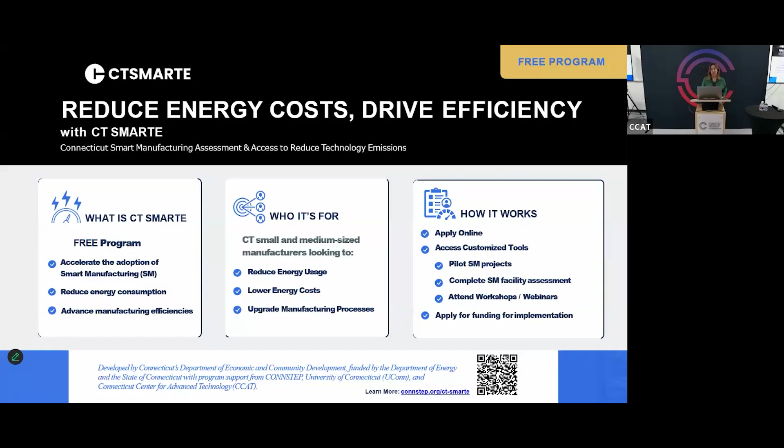We're doing this in a variety of ways. First of all, we are partnering with three great partners: CCAT, UConn, and CONNSTEP. We are providing SMMs with improved pathways to support and funding to enable them to adopt the low-hanging fruit in the smart manufacturing world, which is facility upgrades, but also the more in-depth and more expensive opportunities in digital twin, digital thread, and more advanced technologies.

We're doing that through offering energy and smart manufacturing assessments of your facilities through UConn's ITAC program. We are doing it through offering workshops and trainings such as this one hosted by CCAT. But in addition to that, CCAT and UConn are both looking for demonstration projects.

They want to work on projects for your companies if you're not ready to move into the smart manufacturing realm on your own. Some of these projects include, in the digital thread realm, automated CNC programming, digital twin and machining optimization, autonomous part transport, autonomous deburring, AI vision - and see how smart vision leverages deep learning to perform visual inspection on your parts - and automated inspection. So these are just a few different projects, in order to spark your imaginations, that we are here to help you learn more about and bring into your facility, doing the work for you.

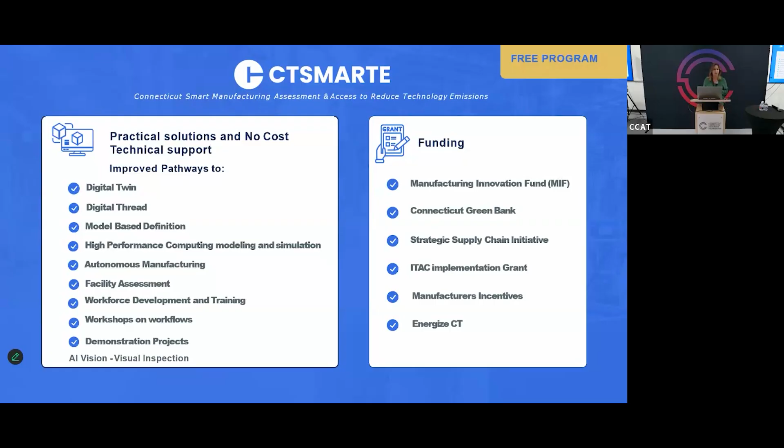We have money from the Connecticut Green Bank. We have a new initiative in the state of Connecticut called the Strategic Supply Chain Initiative. We have the ITAC implementation grants, which is money to bring in some of the improvements and energy efficiency measures that the ITAC team discovers in their facility assessments. There are manufacturers incentives through CCAT's partners. And we also have money from the utilities. They are very willing and able to help support transition to energy efficient components and different products to help reduce energy consumption. That's kind of where we see our best efforts going. We can't reduce the rates, but we can help you use less.

So essentially, benefits: product development, time to market, reduced energy consumption. Here are a few samples of how these things can help save time and energy.

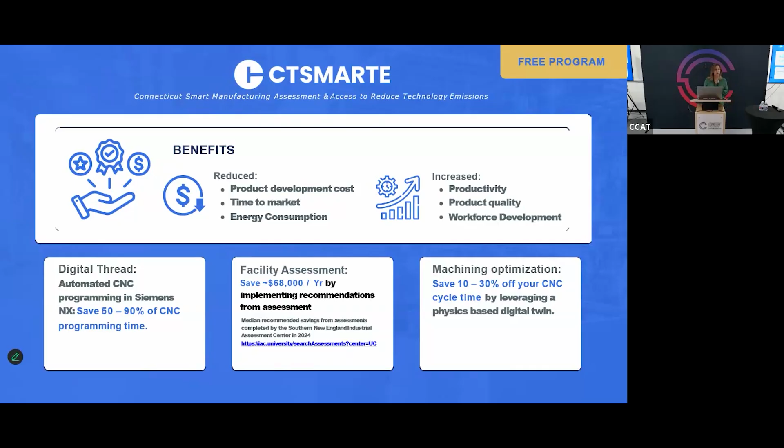So adopting smart manufacturing means a lot of things to a lot of different people. So in order to be more specific, we need you to come to us and talk to us about what you need, and we'll create the right program for you. By being here, you are taking the first step, which we appreciate, and we hope that by scanning this QR code, you'll get in touch with a member of our team.

Other news out of the Office of the Clean Economy and the Office of Manufacturing of the state of Connecticut, with which we are associated: we have a new Chief Manufacturing Officer who is replacing Paul Lavoie, who many of you are familiar with. Kirti Patel is the new CMO. He joins DECD after 10 years leading Eppendorf Manufacturing, a manufacturer of laboratory instruments for the life sciences industry. So we're excited to have him. He's excited to be part of DECD and help continue to move the important manufacturing sector of Connecticut forward. So thank you very much.

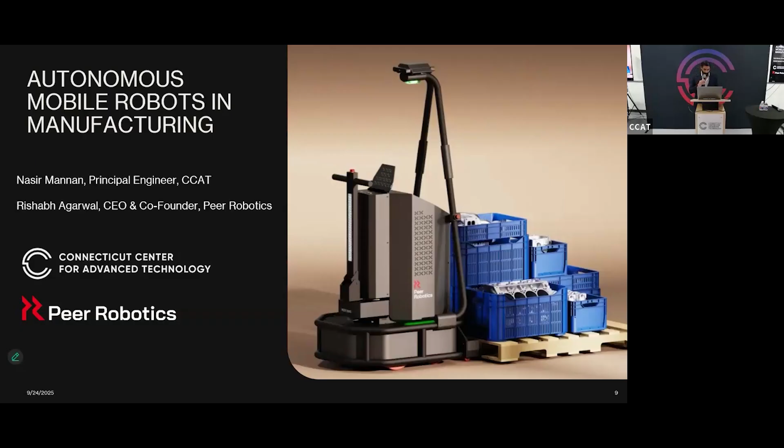We've broken up the presentation into these categories. The most important thing I want to get across is once you understand the basics of the AMR technology, specifically the Peer Robotics solution, what it means when you integrate this into smart manufacturing. We have one example using inspection to demonstrate the value of using an autonomous mobile robot in conjunction with an inspection system, and what that can mean for your manufacturing processes. Then we'll go into a little bit of the numbers.

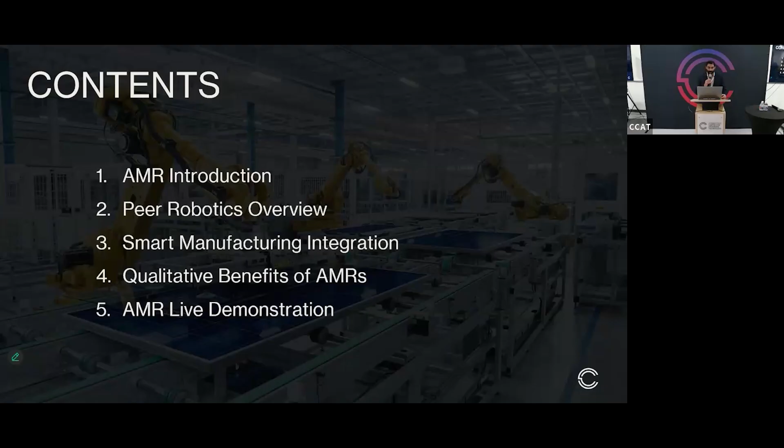What are the benefits of AMRs? What are the energy savings? What are the cost savings, as we compare them against traditional means of moving material or parts around your shop floor? And then, as I mentioned, Rishabh will show a live demonstration in terms of the interface to the robot, and some details there.

A very brief introduction to autonomous mobile robots. These have intelligent, autonomous navigation. AMRs use sensors and machine learning to navigate manufacturing environments independently and adaptively, and you'll learn more about what we mean by adaptively.

It has dynamic route adjustment. Unlike fixed path systems, AMRs dynamically adjust routes based on environmental changes for efficiency. It integrates with Industry 4.0 systems, integrating seamlessly with smart factory components, enhancing productivity and reducing costs.

AMRs improve operational safety and efficiency by performing tasks without human intervention. That's the main key takeaway here. It's without human intervention, and this is where you'll see a lot of the value.

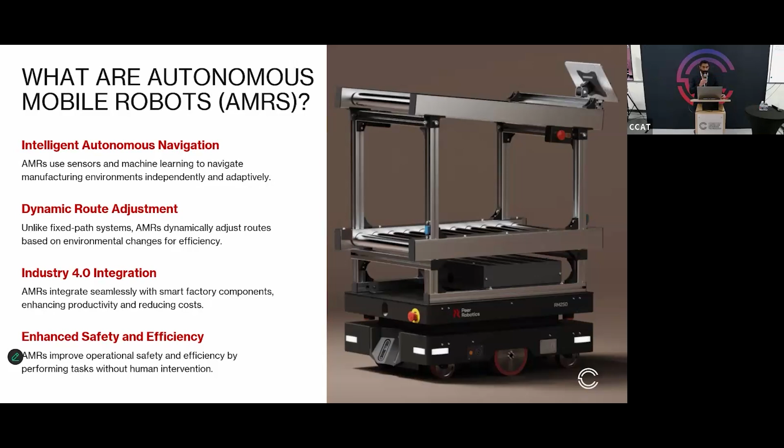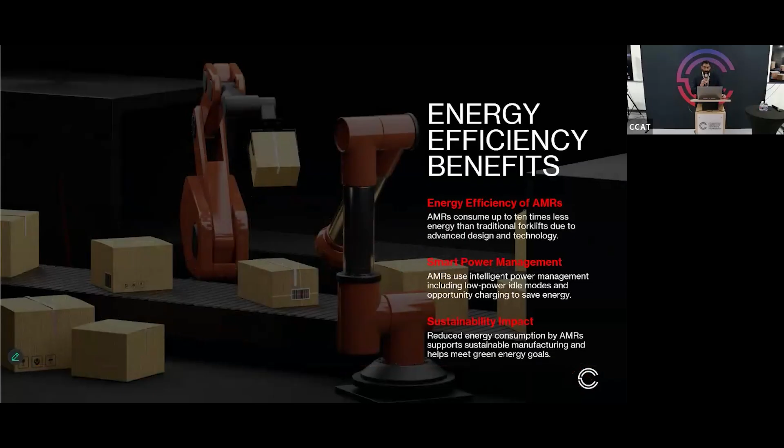On a high level, there are a lot of different energy efficiencies you gain by using autonomous mobile robots for part transport. There are other systems out there, and we'll go through some of them. AMRs consume up to 10 times less energy than traditional forklifts due to advanced design and technology. AMRs use intelligent power management, including low power idle modes and opportunity charging to save energy. This reduced energy consumption supports sustainable manufacturing and helps meet green energy goals.

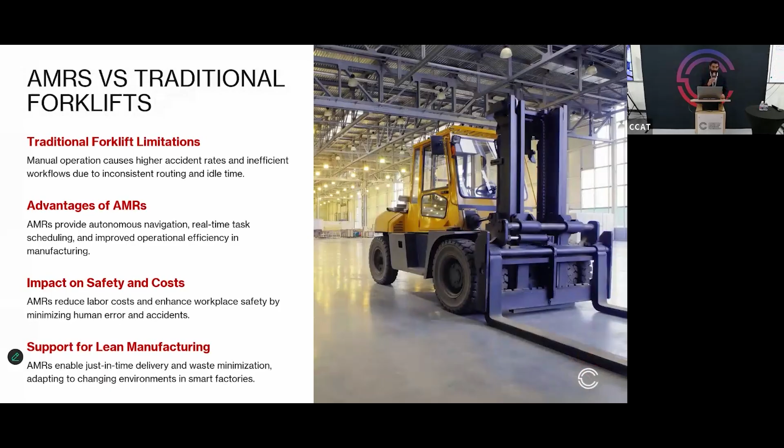If we compare this now to traditional forklifts, there are limitations with forklifts. Manual operation causes higher accident rates and inefficient workflows due to inconsistent routing and idle time. AMRs provide autonomous navigation, real-time task scheduling, and improved operational efficiency in manufacturing. AMRs reduce labor costs and enhance workplace safety by minimizing human error and accidents, and enable just-in-time delivery and waste minimization, adapting to changing environments in smart factories.

To get into more specifics about each one of those points, I'd like to ask Rishabh to come up and talk more about his AMR technology.

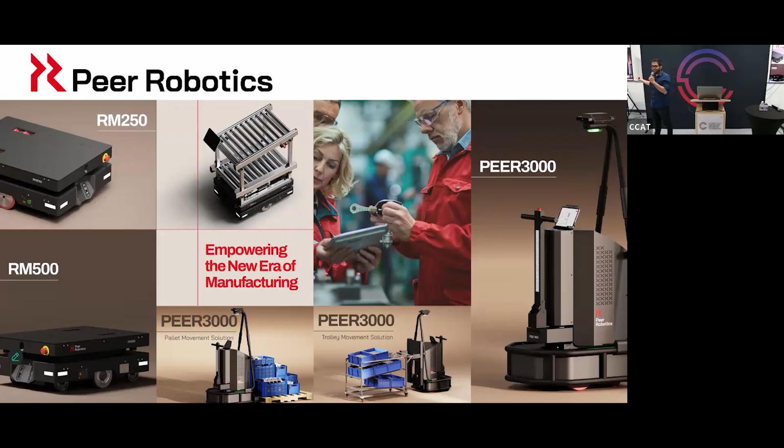So essentially, the core reason Peer Robotics exists is that we can enable these robots to learn from humans in real time. That means anyone on the shop floor can grab these robots and move them around, and in this process, the robot records data from its cameras and LiDAR systems and learns how to do the operation based on user feedback.

At any point in time, the user can teach the robot how it should function and what path it should follow. It's autonomous, but the user can guide the robot, saying that while there are four different ways of doing this particular task, they prefer one way because it's more optimal for their use case. And at any point, the user can take over the robot to put it in semi-autonomous mode.

I'll go through some videos where the robot can be switched to a follow-me mode, where a user doing a task wants the robot to follow them. They go to location X, take over, and the robot just follows the person. They might pick something up or drop something on the pallet or on the robot, and once they're done, switch it back to autonomous mode.

Finally, as Nasir was also mentioning, one of the core things is that all the data the robot collects gets passed back to the users. So it's not just about automating the physical layer, but also about the digital data we can provide back to users to help them move toward the era of Industry 4.0, or even beyond.

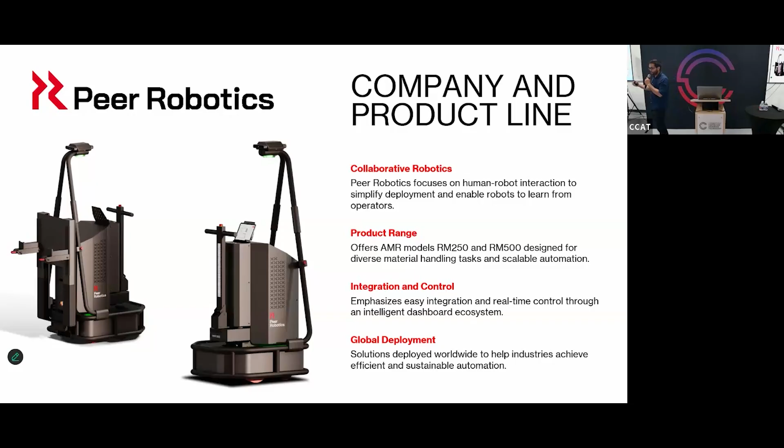Whether it's the digital twin we create as we map out the facility, or controlling directly from the MES or WMS system, tracking which pallets we've moved, where they've been staged, or the stage of a particular pallet in different locations, all this data is given back to the user so they have real-time access to it.

So just to go a little bit more into detail, this is the RM series platform. As I mentioned, they're very compact in size. The idea is to make sure that these robots can go into compact production lines, transfer bins, and really offer a flexible solution.

The product is designed with camera systems and safety LiDAR systems. After this talk, we'll go into more on the hardware side, but it can go charge itself autonomously. Anyone on the user side can even swap out the battery pack, so if they want 24/7 operations without any breaks, they can also do that.

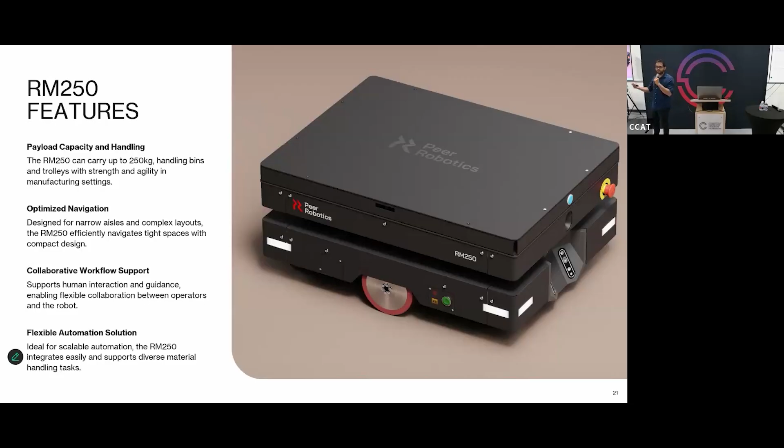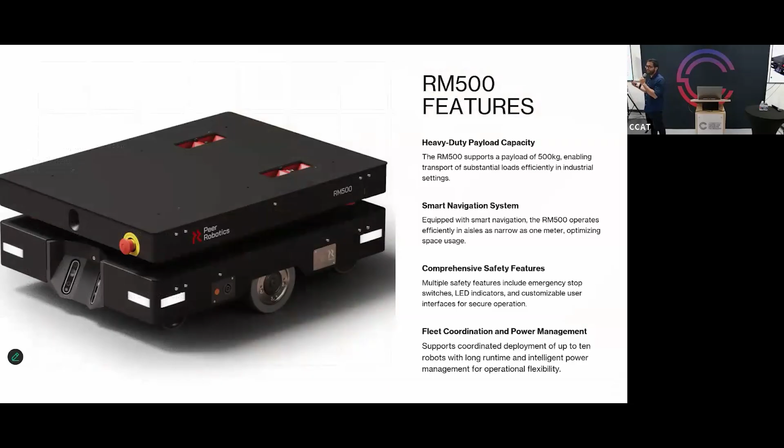More importantly, we can create custom attachments. The conveyor top or different layer systems can be created based on user requirements, personalized to their operations. Same thing for the RM500 - it's essentially just a higher payload capacity system, really used for lifting solutions or heavier items, whether it's an engine part or other custom rigs we want to create on the platform.

It should work. Yep. And this is just one example.

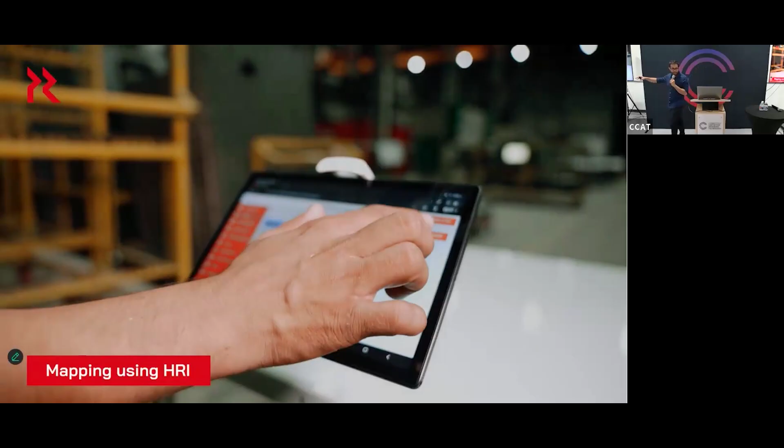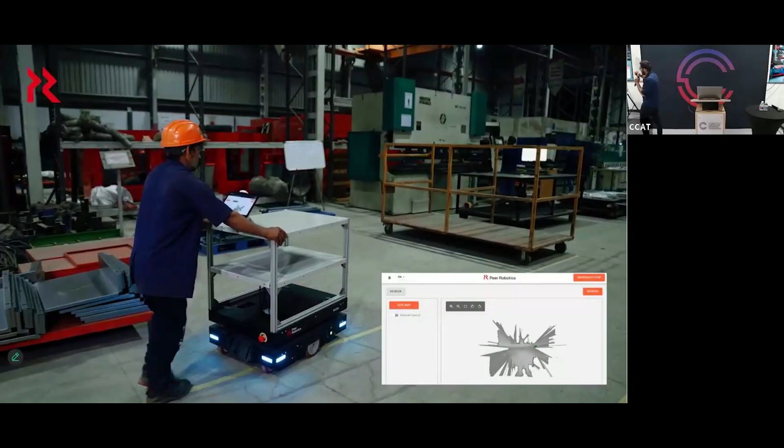We'll go onto the same interface and I'll show you these things again. The whole idea is that anyone on the shop floor can train the robot in real time. They can switch the robot to a learning mode, and as soon as the robot goes into learning mode, as they're moving it around, the robot creates a map of the facility. So you can teach an entire space to the robot by just walking it around like a trolley.

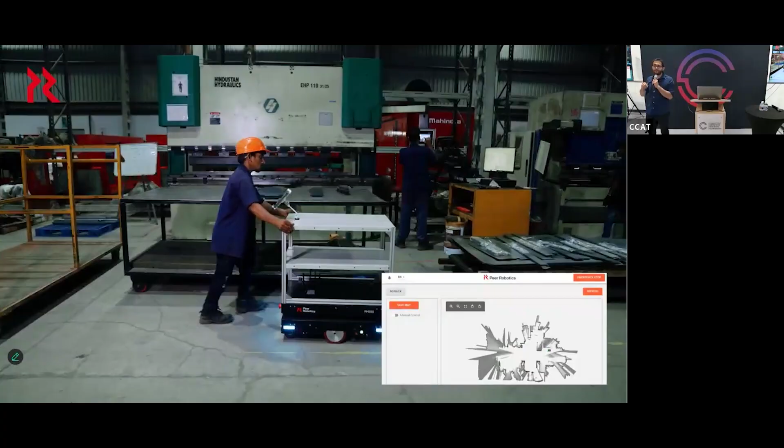You can even teach a specific path - telling the robot that now I'm going to teach you a specific path you need to follow, so you don't go into any open space, just on this taught path. You can easily teach that using the same interface.

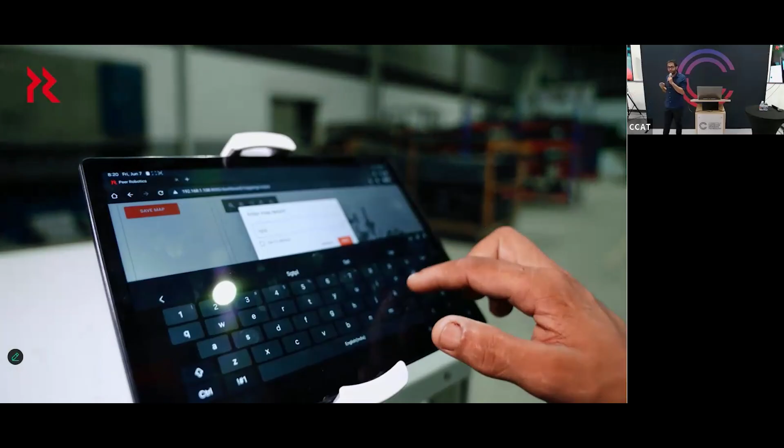That's the real patented value that we bring to the table, where we allow people on the shop floor to integrate and deploy these robots, to have that level of control. Because everywhere else, you would have to rely on complex engineering to come and reprogram these systems. And as we know, small manufacturers constantly change their operations, so if something changes tomorrow, we want them to have the flexibility of reprogramming or adapting this technology.

I'll start with the video for Peer.

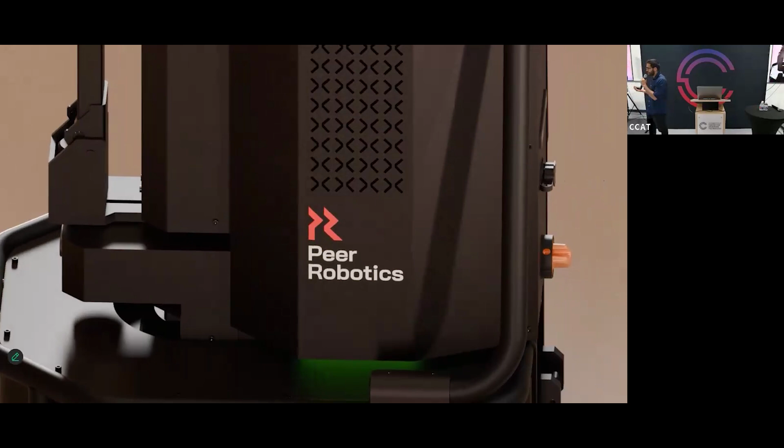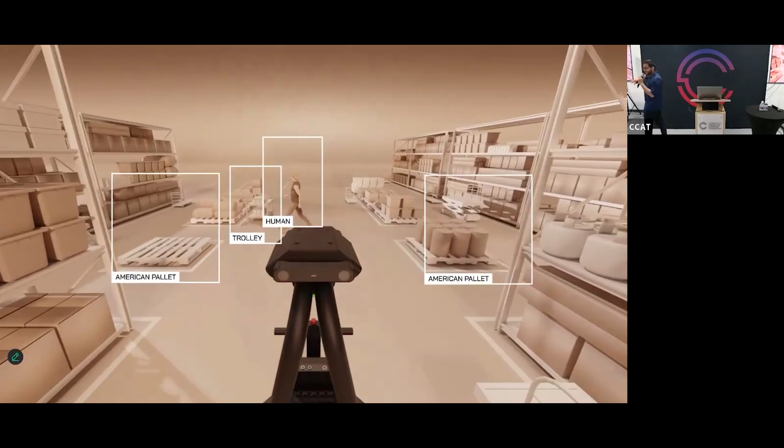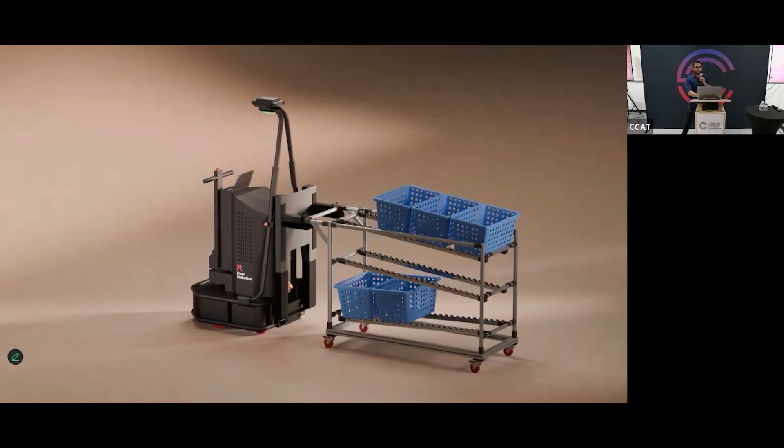It can differentiate between trolleys and pallets. So as you might notice, as the robot is moving around, it's clearly detecting that okay, that's a pallet, that's a trolley, that's a person that I'm trying to track. So when it's navigating around, it has different behaviors for different assets.

Imagine the robot has to go and drop a pallet - it knows that pallet-to-pallet staging would happen. So if there's another pallet very close by, I still want to go almost 2-3 inches close to that pallet and drop it there. We don't want space unoptimized or unutilized. Whereas if there's a person, I don't want to go 2-3 inches close to a person and drop a pallet there.

So that's where it's very important that the entire robot is built upon vision intelligence. It has LiDARs for safety, but its entire intelligence stack is built upon a custom vision stack to enable that.

The other core aspect of the platform is we wanted to create a system that adapts to our users' requirements rather than asking our users to change their operations to adapt to the robot's requirements.

That's where the hardware is designed from the point of view of creating end effectors. We are very much aware of manipulators having different grippers or end effectors for different tasks. We brought in a similar concept where we swap out different attachments to adapt closer to the user requirement.

What that means is it allows us to adapt to your existing assets, automating them without modification. No need to change layouts, replace infrastructure, or upgrade whether they are moving a train of carts, trolleys, a closed American pallet, or a European pallet — the robot can adapt to those requirements.

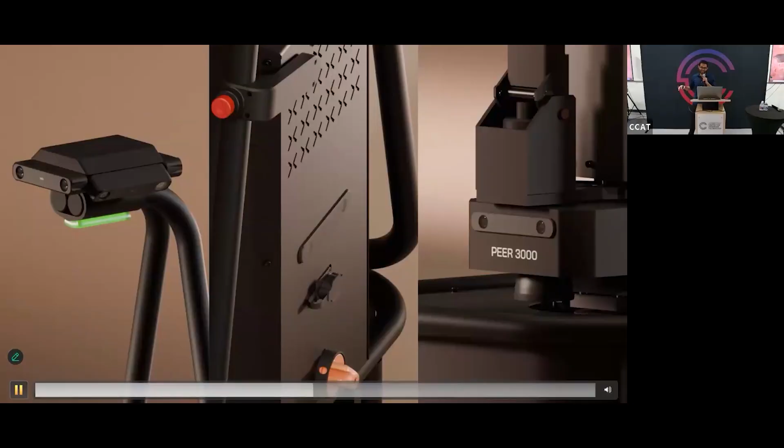Peer 3000 learns by observing its environment. With its extensive sensor suite, it captures rich visuals and spatial data. This enables the robot to build a human-like understanding of your floor layout, allowing it to navigate naturally and safely within your dynamic environment.

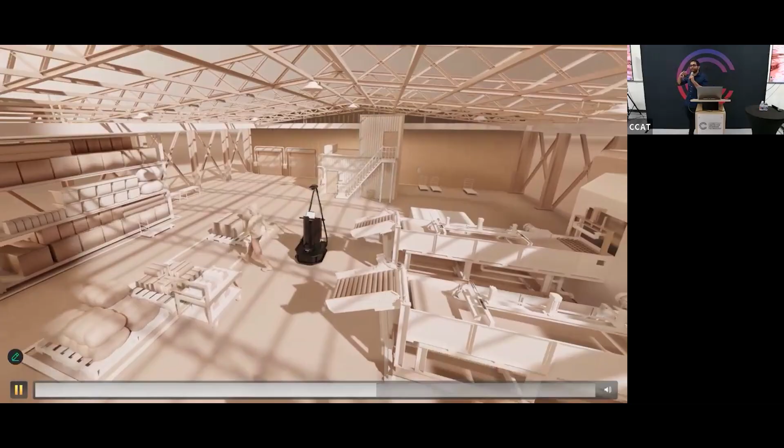All learning happens on device. The only time we communicate to the cloud is to pass on information regarding which mission we are going to do next, or to take feedback on what we have completed, with no reliance on the cloud or MES/IT system.

Peer 3000 is collaborative by design. We wanted to build a system that operators can grab and guide like a regular pallet jack, and that can adapt and learn while performing realistically.

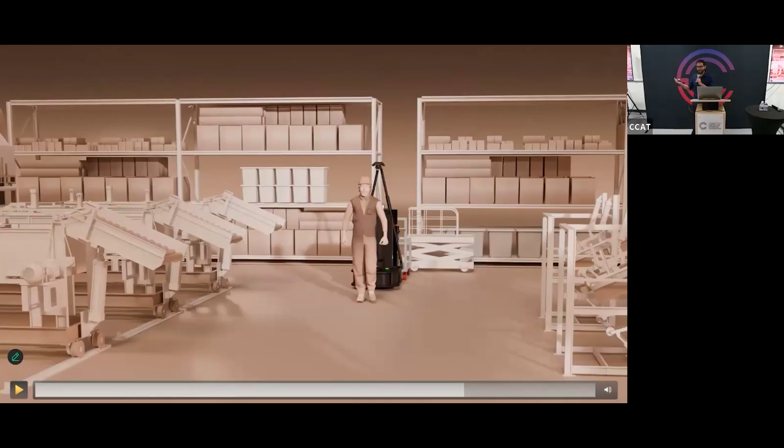We all know Wi-Fi in manufacturing is not the best, right? So we don't want to rely on any safety or intelligence aspect that is Wi-Fi dependent.

Similar to RM250, the robot is collaborative by design and can also understand human feedback. You can grab the platform, move it around, and it acts just like a pallet jack — intuitive and hands-free. You can take over the system at any point, or tell the robot to follow a person using the follow-me feature.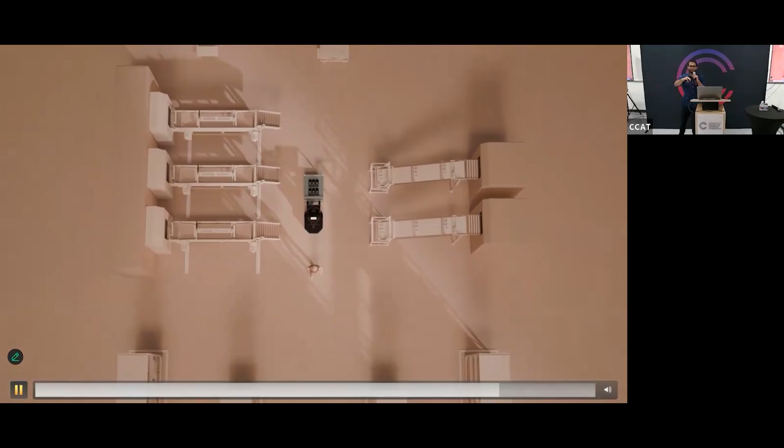From narrow aisles to varied payloads, Peer 3000 flexes to your operations. I'll show you more videos so we can have more discussion afterward, where I can walk you through how this platform works for you and what areas we have already deployed these systems into.

That's a very high level overview of the platforms that Peer Robotics offers. Our whole mission is that we want to build something which can adapt to our user requirements, and we want to empower people on the floor to have the control to deploy, train, or reprogram these robots as and when they want.

So with that, I'll bring back Nasir. He will talk more about how joint end-to-end integration can happen with these platforms, with AMRs to other MES or manufacturing related ecosystems.

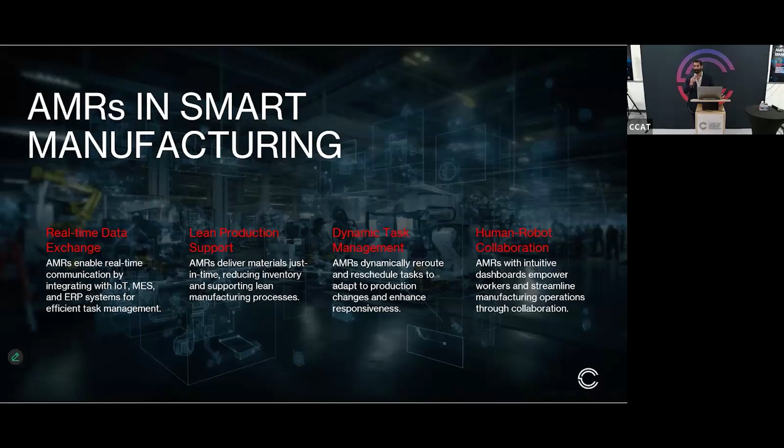So what I'd like to get into now is to talk more specifically about the use case, one of the use cases that we're setting the system up for now. But before getting into that, I want to talk about non-contact inspection in case you're not familiar with it. Typically with inspection, we talk about manual inspection, maybe using contact-based systems like CMMs or hand measuring devices such as calipers and other measuring devices.

So just to level set, let's quickly talk about non-contact inspection and what it is, and then how that relates to the AMR system we're talking about here today. The main features of non-contact inspection - obviously with any inspection system, there's calibration. You have to calibrate the unit.

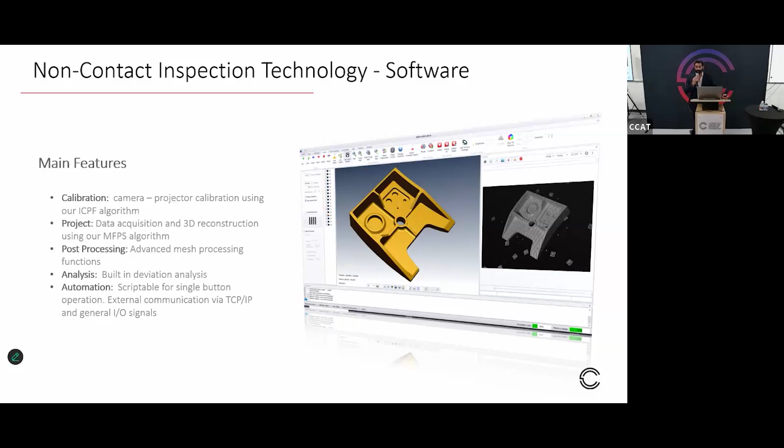Then after that, you export that mesh out and put it into an analysis software, or you do it within the scanner software if the particular brand has that built in, and you extract measurements off of it. As an example, this is a deviation analysis that can be done within most scanning solutions.

Here, what we're doing is importing the CAD model, and then using the alignment tools within the scanner software to align the 3D scan to the CAD. We can do that just on best fit or with specific features - if we have datums that we have to align to, we can use that in the software. And then the first thing we can run is a deviation analysis. For every point captured with the 3D scanner, it can calculate how far off it is from the CAD surface, and it colorizes that.

So what you're seeing here in green is a range that was set to say colorize all the data points that are within plus or minus, let's say 5,000ths, which might be a global tolerance on the part, to colorize it green so we can see what's in tolerance, and anything that's out, color it a different color. In this case, red is where my physical part has too much material, and blue is where my physical part has not enough material. So you can see exactly where it's in and out. But then you can also extract hard dimensions off of this as well.

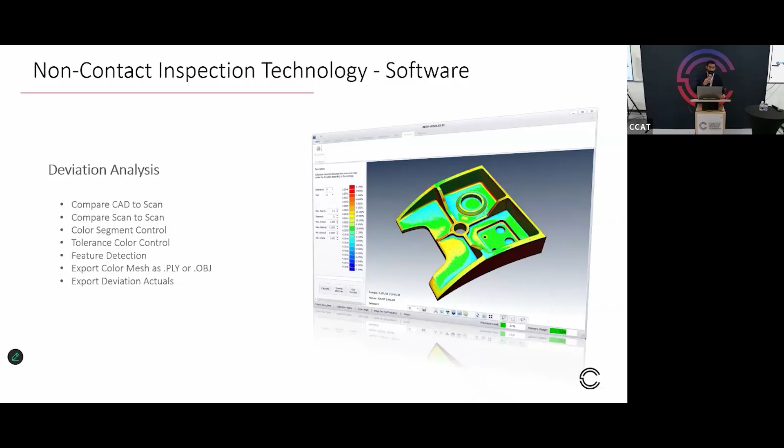When we walk around the lab here on the other side, I have a little demo set up of a scanning unit just to show you a little bit more about what the systems do.

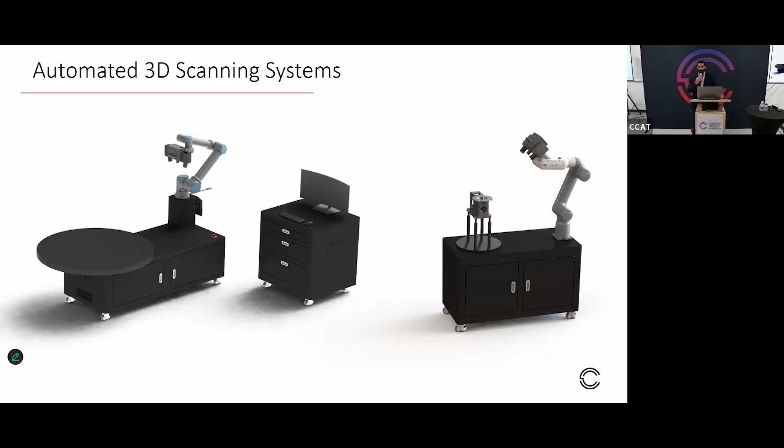As I mentioned, you can do full extraction of dimensions, generate first article inspection reports. You can use it for other applications as well, like reverse modeling, where if you have a component that doesn't have a CAD model, or the drawing's difficult to read, or maybe you don't have a drawing on it, and you want to create a CAD model for it and a drawing. So you can scan it, you can model it from the scan, and then you can capture that digital data on the physical part.

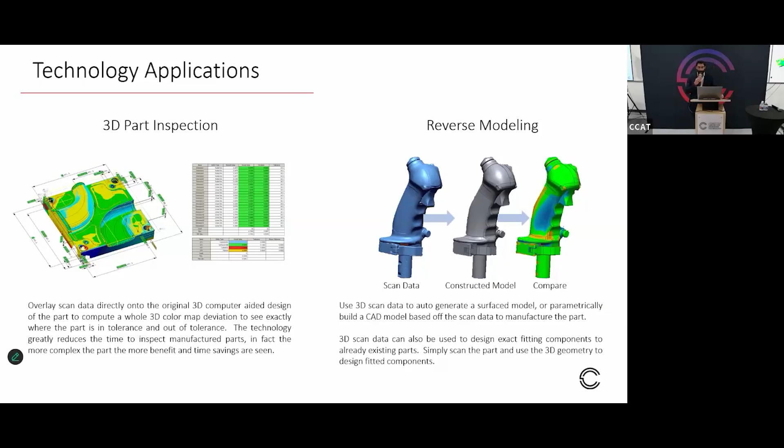Other applications would involve, like if you were to manually modify a part, for example, for fitting it into an assembly, and you want to capture that change, you can also scan the part and add that change based off of the scan data set.

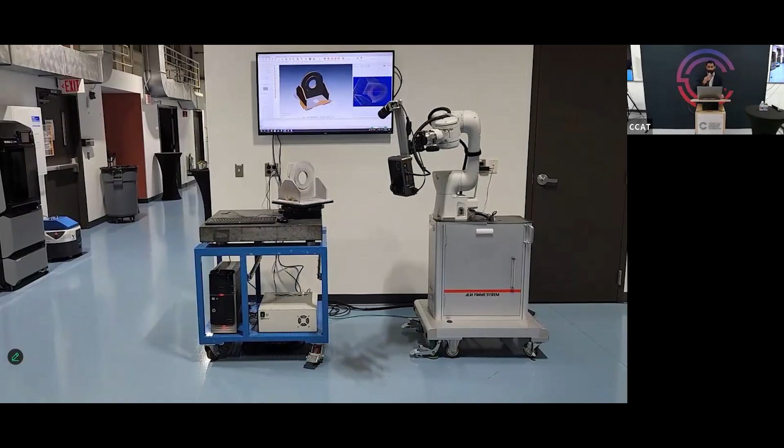So this is just a quick video about the process. Normally you would put a part in front of the scanner, and you can see the robot. The scanner is attached to the robot, so the robot's just moving the scanner around. It's working in conjunction with a rotary system, so that we don't have to move the robot quite as much. We can just present different views of the part using the rotary, and then we can move the scanner to get top, middle, and bottom of the part there.

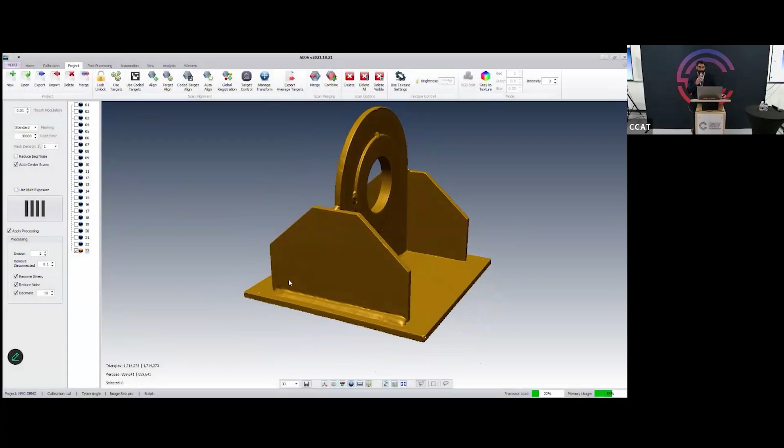What it does is it projects a series of line patterns, and it just uses the camera to then reconstruct the full 3D model here that you see on the screen. But this is in mesh format. So really the data here is a bunch of 3D points along with the triangles and normals and other information that mesh data contains. But typically with these systems, you can get millions of data points, right?

With the system that we use there, it's a 3-megapixel camera. They go up to 45. For each shot, you get 3 million points. So if you add up the number of shots, you end up with a lot of data there.

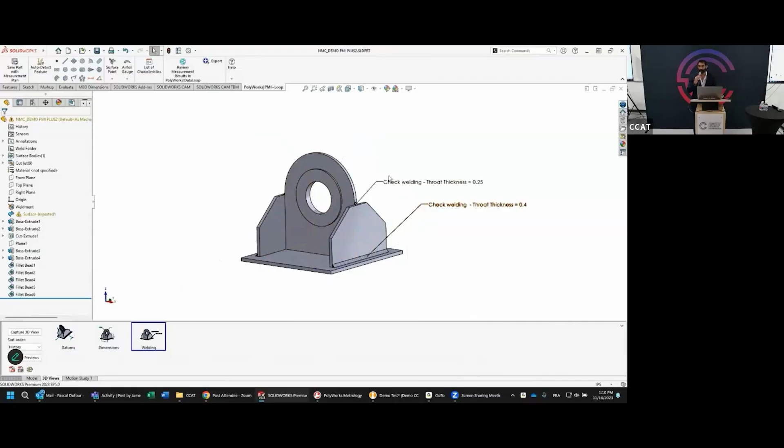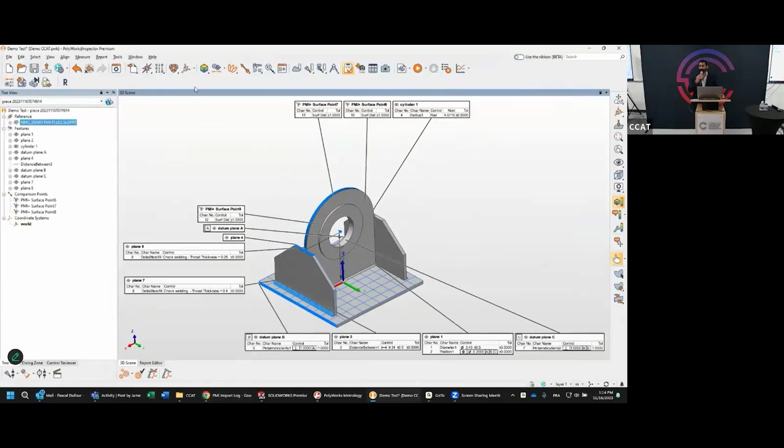This next video is going to show what happens once that data is captured. We import the CAD, and in this case, we're using model-based definition, which is CAD with the embedded PMI. So that is all the callouts of what needs to be inspected. We don't have to set that up necessarily manually, it just gets imported. And then what we can do is generate the first article inspection report by just clicking a button, and then just importing that scan data set that we had grabbed, and then letting the inspection software extract all the measured data based off of the callouts that are already there.

And what I just talked about is a process where a part is produced and then we inspect it, right? So the problem with that is that we're not going to know if a part is made correctly until after the fact. So we would have gone through the whole manufacturing process to then scan it or to inspect it, only to discover that the part doesn't meet specs, right? Unless you're doing in-process inspection, maybe hand measurements, or maybe some kind of a CMM system that you bring the parts to, or maybe a vision system that you use to kind of scan parts in between.

The final inspection is typically where the part is accepted or rejected. If we waste all that energy that goes into getting that part up to that condition, and then we're at the point of scanning it to discover that it doesn't meet spec, we've essentially wasted that energy. So if we look at how we can take advantage of inspection systems and bring it to the machine, so that we're not just doing in-process inspection where we go from one machine to another and inspect in between, but we're actually doing inspection on the machine, using the scanner as a sensor to communicate back to the system the corrective action needed to get that part in spec.

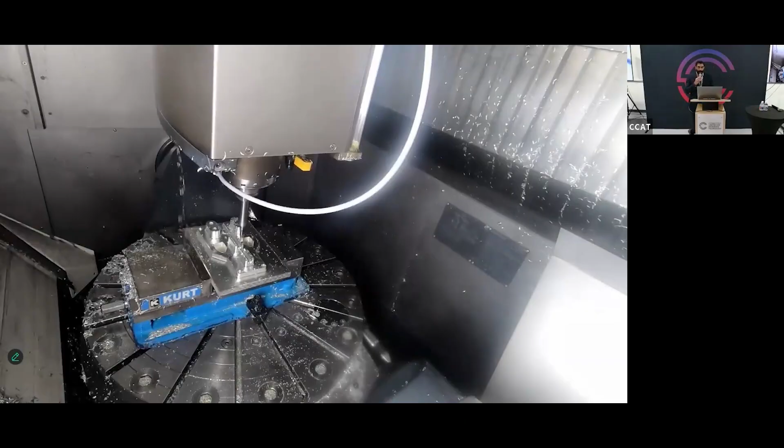This is an example video of using one of the smaller compact units and integrating it with a CNC machine. You can very quickly see the value of that as we go through the video. In this case, it's a CNC machine, and we have a part. This is just the final part of the machining operation, cutting those two slots that you see it machining currently.

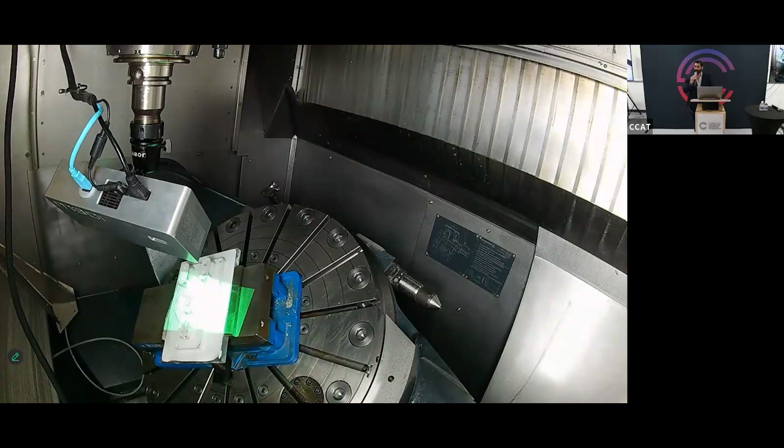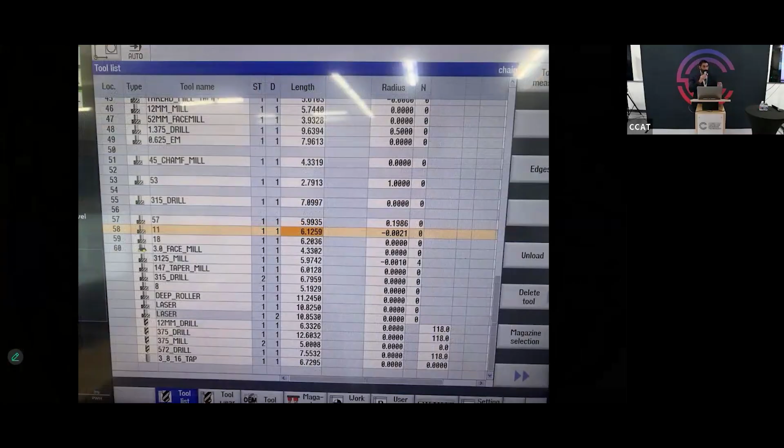Once the machining operation is done, the machine actually goes and picks up the scanner in the spindle, and we scan that part. That part can be scanned at any point, so if we do one operation, we can scan it after that, do another operation, scan it after that. But in this case, what we're picking up is that the width of that slot it cut is not in spec. And because the scanner is integrated with the machine, it knows what tool cut that slot, and it sees that it has a radius offset.

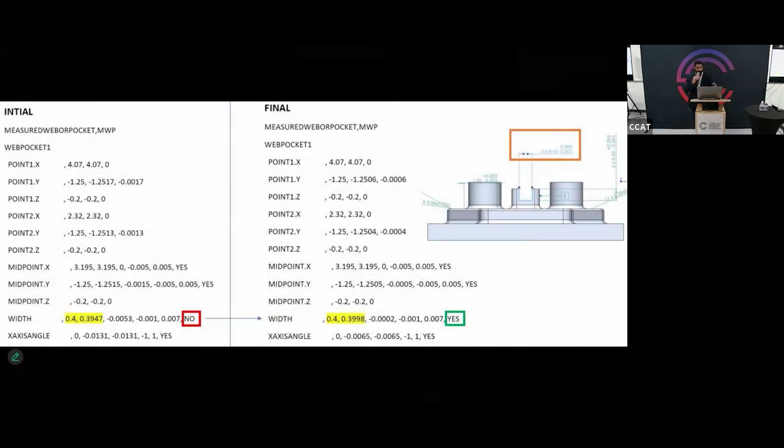Because it knows the deviation of the slot, it can provide information back to the machine to do a tool radius offset to compensate for the tool wear causing that slot to not come in spec, and now go back and remachine that specific tool path, that specific operation. You just saw there that it went and did a very slight trim cut. The scanner will then go back and rescan it, and check to see if that slot is now within tolerance. In this case, it only required that one iteration to get the width of that slot to within two 10,000ths of an inch.

The system can go through—we had it set up to go through 3 times. So if it did it once and made that corrective action, scanned it, and it wasn't in spec, it would do it again. After the 3rd time, it would just give the operator the notification that the tool needs to change; it can't do anything more to correct. In this case, it's a tool radius offset, so it's pretty straightforward. But in other cases, there might be other corrective actions needed, like tool length offset, or feeds and speeds override, things of that nature.

You can see here right away that while my part is still on the machine, I'm not wasting any time. I'm not taking the part off the machine, putting it into another operation, and then scanning it after the fact or inspecting it after the fact to understand that the part's not good anymore.

In essence, this becomes an autonomous inspection, if you will, where the scanner communicates directly with the machine, extracts dimensions, and based off of those dimensions, knowing the tool and the actual operation associated with the particular feature, it can re-execute a machining program with adjusted parameters on the machine, giving the machine the ability to kind of sense what's happening and make a corrective action.

If we look at it from an integration standpoint, that means different machines have different environments. The CNC machines have coolant—it's a pretty caustic environment. You need to have protection around the scanner. It is a vision-based sensor, it has lenses. So if you think about what I just showed you there...

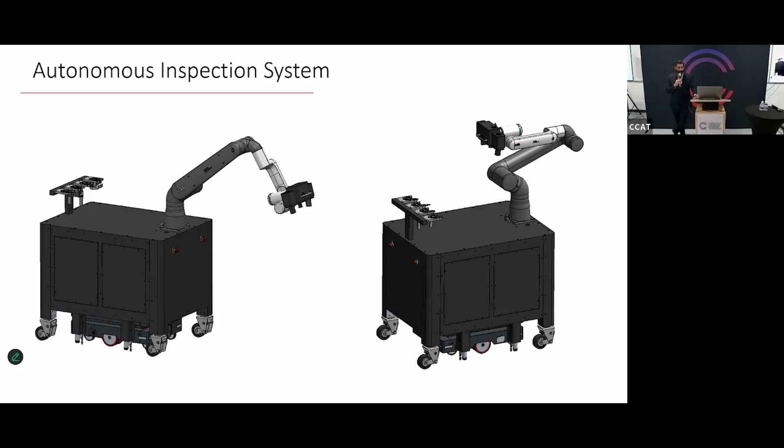We're in a circumstance here where we have a completely mobile unit that can be programmed to do on-machine inspection and provide that feedback to the machine controller or to an edge device connected to the machine, to take corrective action at the point when it's needed, thereby saving time, saving energy, and saving you from having to reject parts. The goal here is to have 100% yield.

Here's an example of the application where the AMR actually brings the whole scanning unit over to the CNC machine. The CNC machine would request the AMR to come over, and the collaborative robot would then activate, perform its task as the AMR brought it to the location, and go inside the machine. It would scan the part, come back out, and provide that data through the MES system, so the CNC machine can pick that up and adjust whatever parameters are necessary based on the root cause analysis and the parameters we've mapped to what caused the issue, and then perform that corrective action.

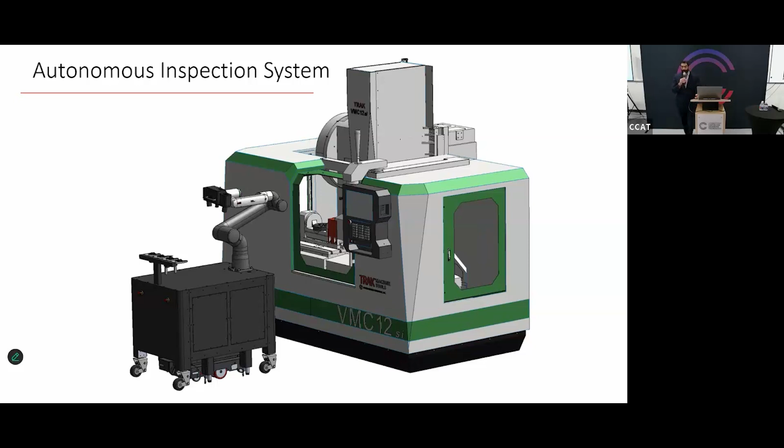So again, here we're avoiding the circumstance of having to specifically integrate it into a machine and subjecting the scanner itself to a caustic environment. The AMR brings it to the machine, and now that system can be used across the shop floor wherever it's needed. This is just a quick flow diagram of the process working.

Using model-based definition, there are several different formats that can be used here: native CAD files like CATIA, SOLIDWORKS, NX Creo, or a neutral format called QIF, Quality Information Framework, which is a CAD model with all the embedded PMI. If you're able to utilize that format, programming the system is easy—you just do a file import. Everything else is taken care of by the software: the programming, the robot motions, the actual first article inspection report generation, extraction of dimensions. It's literally a few mouse clicks.

And then with what you saw demonstrated with the Peer Robotics system, it's very simple to program—you push it around, you give it a mission, and you're good to go.

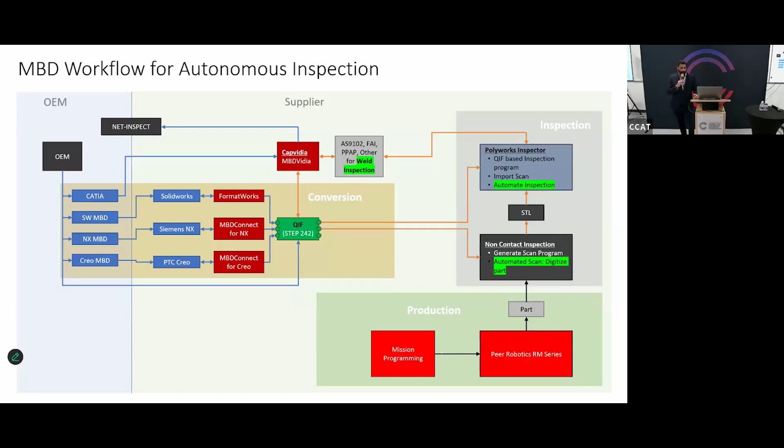We can even take this a step further. We're taking advantage of an AMR system to stop the manufacturing process at some point, take a scan of the part, understand where we're at, and provide corrective action control. But what if we can then even save time on the machine? Because what I'm presenting right now is that the process does have to stop, and the scanner does have to go into the machine and scan the part—so that is adding to your overall manufacturing process.

Well, what if we can train what's called a predictive model? Let's say we're doing a batch of 100 parts, and the AMR system is used to scan the parts intermittently as they're being produced on the machine, while we're collecting real-time data off the machine using an edge device or sensors connected to a main platform where that data is being streamed. We take the real-time data and the inspection data and use machine learning or standard statistical algorithms to train a predictive model.

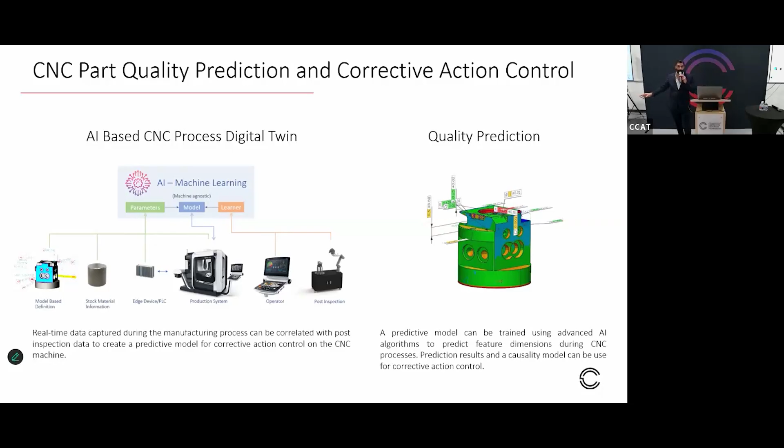Where the AMR comes in is that you can set this up where you set up missions to go and scan parts on the machine to collect all this data. As Rishabh said, we have even more data coming off the AMR that we can leverage in this particular circumstance.

So that was a very specific use case, and what we're setting up here, we will have actively working towards the beginning of next year for demonstration purposes. We will hold another one of these Connecticut Smart events to demonstrate that process next year if we have the opportunity. So if you want to see that working and all the integration work we're doing, we'd be happy to present that. We are also looking, as Nancy mentioned, to do company-specific projects, so there's some other opportunity to get hands-on with this.

Now I'd like to switch over to giving you the numbers, right? Quantitative benefits of AMRs in manufacturing. So we got an overview of AMRs, a specific use case we're setting up here at CCAT for autonomous inspection and part transport between machines. But what does it mean in terms of numbers? What is it saving you? Is it actually energy efficient?

So if we do a comparative cost analysis of AMRs versus traditional systems, AMRs offer substantial cost savings compared to traditional materials transport systems in manufacturing environments. For instance, the operating cost of an AMR is estimated at $40,000 to $50,000 per year, whereas a forklift combined with a driver incurs costs ranging from $200,000 to $280,000 annually. This translates to an approximate 80% reduction in operating expenses if you switch from traditional to AMR means of transport.

Additionally, AMRs operate at just 15% of the cost of manual cart movers, making them a highly economical alternative to human labor for material transport compared to traditional conveyor systems. AMRs can deliver a 50% cost reduction for equivalent work, especially when conveyors are suboptimally loaded or used sporadically. These figures underscore the financial advantages of deploying AMRs, particularly in large-scale operations where labor and equipment costs are the driver. They're very significant. The cost efficiency of AMRs is further amplified by their ability to operate continuously without breaks, reducing the need for multiple shifts and associated labor costs.

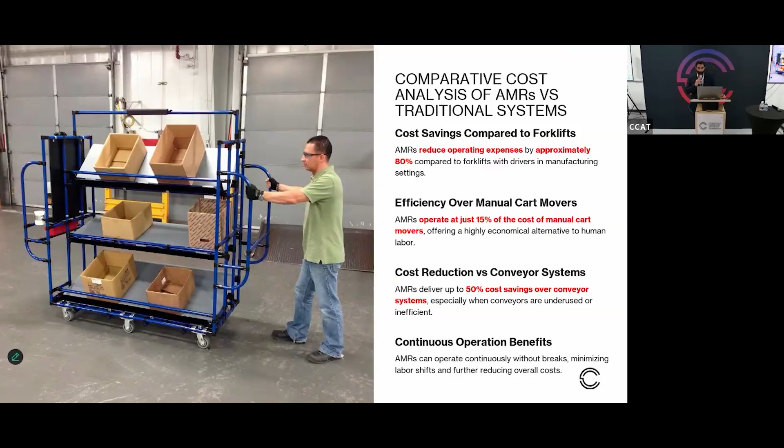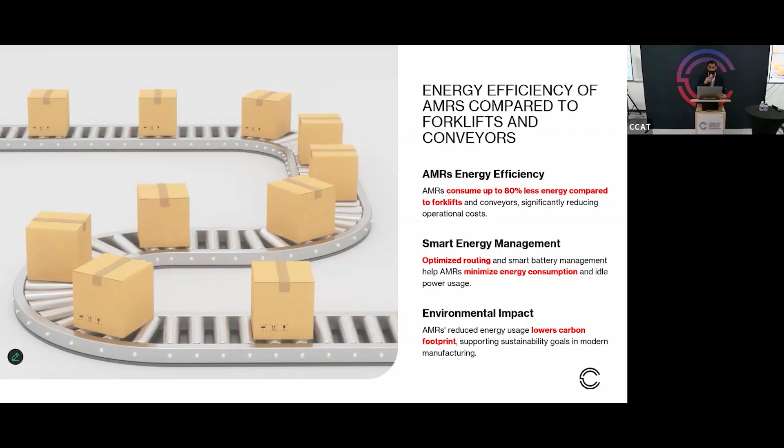But the takeaway here on this slide is that it consumes up to 80%, right? It's not 10 or 20%, it's 80% less energy compared to forklifts. And as we saw with conveyors, it's more energy efficient there as well.

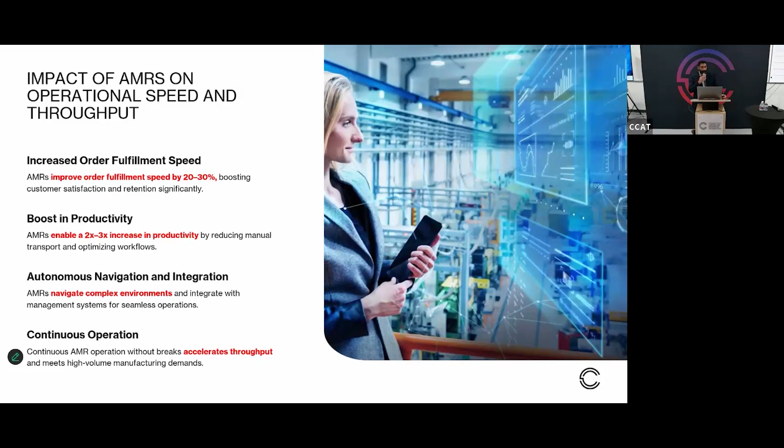So to summarize: AMRs improve order fulfillment speeds by 20 to 30%. AMRs enable 2 to 3 times increase in productivity. AMRs navigate very complex environments. Imagine setting up a conveyor system in a complex environment, AMRs can do that with ease. AMRs operate continuously without taking breaks, and that ends up accelerating throughput.

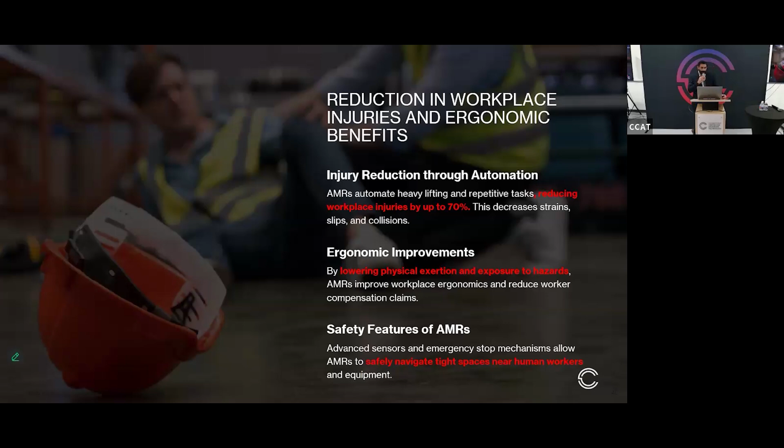There are some other byproducts here as well. AMRs automate heavy lifting, as we saw with the 3000 series, repeatedly lifting heavy payloads, reducing workplace injuries up to 70%. They also lower physical exertion and exposure to hazards, and AMRs safely navigate tight spaces near human workers.

A lot of different ways of seeing the benefits of autonomous mobile robots. Like I said, we are setting up a specific use case, but I'll walk you through the digital side of the Advanced Technology Center to show you the setup of our autonomous manufacturing cell.

We have multiple different machines in this cell, anywhere from CNC machining to laser machining centers, to sheet metal benders, to laser welders, assembly stations, and cleaning and painting stations. We want to demonstrate the true value of using a system like this without having to design traditional part movement using conveyors or forklifts.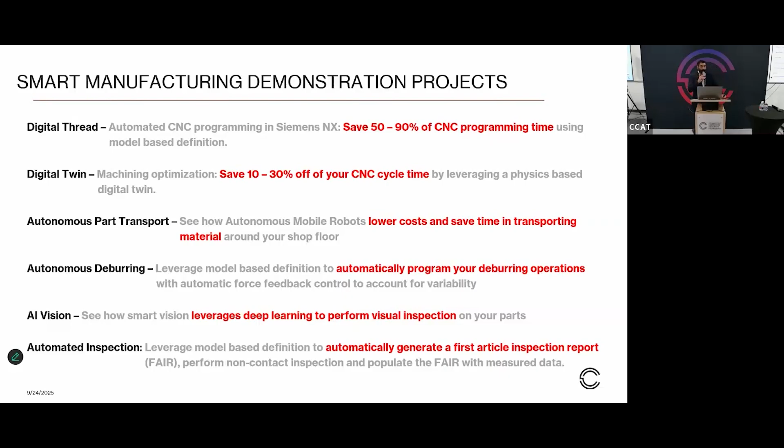And then autonomous inspections, or automated inspection, here. In this case, we can show you how to leverage non-contact inspection and model-based definition to automatically generate first article inspection reports and to generate non-contact inspection programs that use robotics for scanning.

To take away from this slide: the digital thread enables automation of production programming, and the digital twin can help control manufacturing variability. Both of those we're going to incorporate onto the AMR system. So this is a very powerful platform to enable a lot of different processes to happen.

We also have grants that are available. So if we do go through a technology demonstration with you, and you see the value of the technology and get to the point of wanting to adopt it, you can get the quotes, and then we'll work with you to bring you to the right grants that you can use to actually onboard the technology.